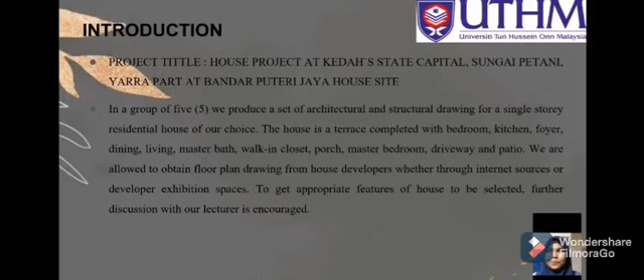We are allowed to obtain floor plan drawings from house developers, whether through internet sources or developer exhibition spaces, to get appropriate features of the house to be selected. Further discussion with our lecturer is encouraged.

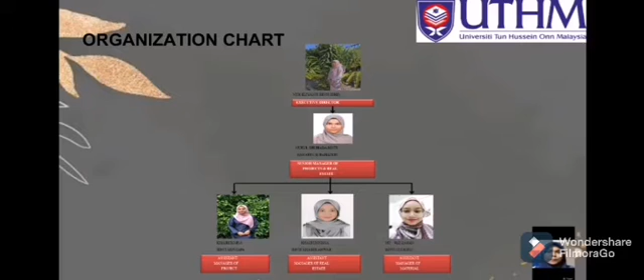For the organization chart: our executive director is Nur Izianti binti Idris. Our senior manager of projects and real estate is Nurul Shahada binti Bahrain alias Bahadun. Our assistant manager of project is Karunisa binti Mustafa. Our assistant manager of real estate is Karunisa binti Karil Anwar, and our assistant manager of material is Nur Zaya binti Zulkifli.

Project description: the location of the project is at Yarra Park, Bandar Puteri Jaya, Sungai Petani, Kedah. The feature of the house will be a one-story terrace house, 3 bedrooms and 2 bathrooms, and a porch. The size of the house will be 6.5 hectares.

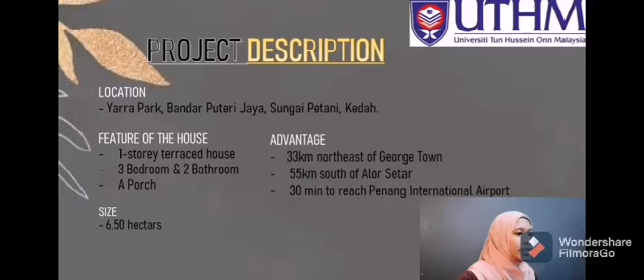The advantages of this project are: first, it is located 33 km northeast of George Town, and located 55 km south of Alor Setar. The third advantage is it only takes 30 minutes to reach Penang International Airport.

This is the feature of the house. One of the features is urban design criteria. The proposed building will create a distinctive urban form in the local area. The concept plan and build form were developed to propose materials which are in harmony with the existing buildings and surrounding developments.

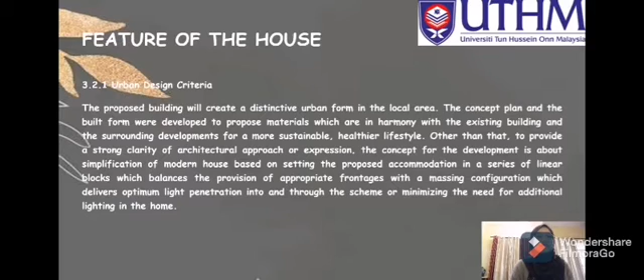To provide a strong clarity of architectural approach or expression, the concept for the development is about simplification of a modern house based on setting the proposed accommodation in a series of linear blocks, which balances the provision of appropriate frontage with a massing configuration that delivers optimal light penetration through the home, minimizing the need for additional lighting.

The next feature is structure. One structural feature of this house is the overhanging roof. The house is designed with large overhanging roofs that act not only as protection from pouring rain, but also as a sun shading device that reduces direct exposure to sunlight into the house, and reduces heat gain and glare.

Next is concrete and steel structure. The main material of the structure of the house is steel. It is used as a structure that supports the main structure, which is the reinforced concrete used as the foundation.

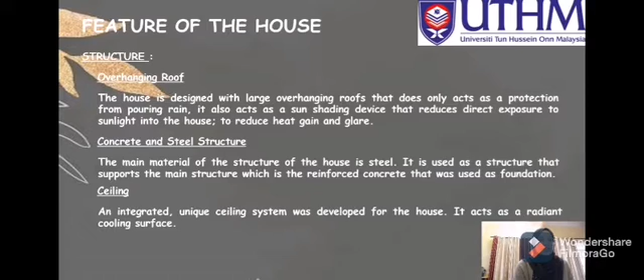The last structural feature is the ceiling. An integrated, unique ceiling system was developed for the house, which acts as a radiant cooling surface.

Next is house description and design. First is orientation. The house was oriented facing the northeast direction, with southwest as the back. The direct sunlight diffusing into the house from the east and west was minimized by the strategic orientation of the house.

The second description is interior design. First, multiple suites: this house has one master suite and 2 bedrooms, providing private space for each of the large family members while enabling them to share resources under the same roof. It also gives benefit to a large group of friends who desire to share a house in order to afford real estate in a desirable area.

Next is eco-friendly.

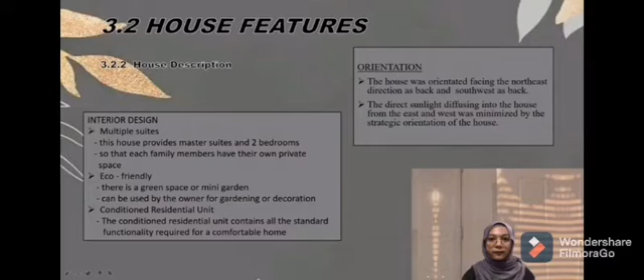Inside the house area, there is a green space or mini garden that can be used by the owner for gardening or decoration. At the same time, it can help with air pollution as a few indoor plants can help improve air quality. Why should people buy our house?

First, it's an eco-friendly house. Our construction house is considered an eco-friendly house because it is an environmentally low-impact home design, built using materials and technology that reduce its carbon footprint and lower its energy needs. An eco house could include some or all of the following: higher than normal levels of thermal insulation, and better than normal air tightness.

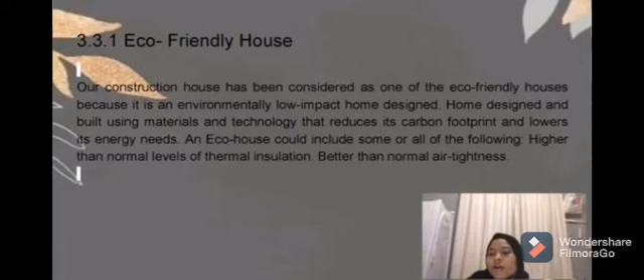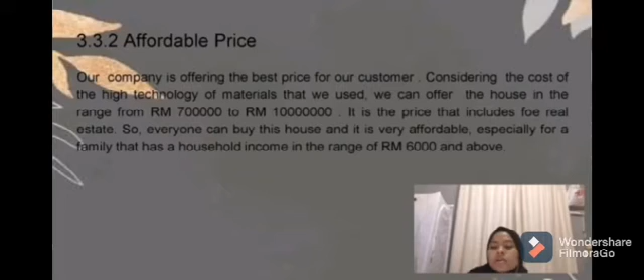Second, affordable price. Our company is offering the best price for our customers. Considering the cost of the high technology materials we use, we can offer the house in the range of 700,000 to 10,000,000 Malaysian ringgit. This price includes full real estate. So everyone can buy this house, and it is very affordable, especially for a family with a household income of 6,000 ringgit and above.

Third, strategic location. The location of the house is very strategic since it is in the middle of the city. It will be easier for the owner to go to work and shopping. There are many public facilities in this area, due to the location near the hospital, shopping mall, and there is also a playground to play sport on the weekend. Besides, the neighborhood is safe because the residential area is guarded 24 hours a day. Moreover, the house is right on the waterway with a beautiful panoramic view.

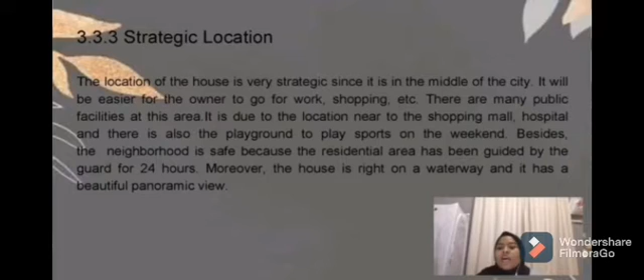Another reason to buy our house is access to public transit or freeways, since the location is in major cities, the house is closer to public transport. For example, it is close to the train station and bus station, which makes it much easier for people to get to the residence anytime and anywhere.

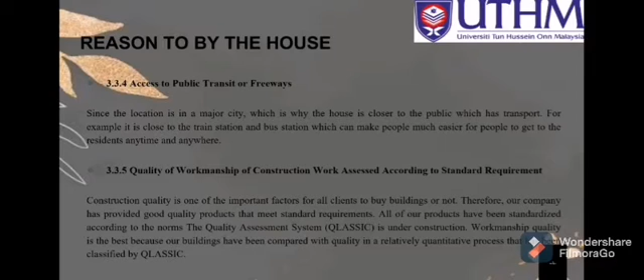Next, the reason to buy the house is the quality of workmanship of construction, which is according to standard requirements. Construction quality is one of the important factors for all clients when deciding to buy a building. Therefore, our company has provided good quality products that meet standard requirements. All of our products have been standardized according to the norms, with a quality assessment system in place during construction. Workmanship quality is the best because our buildings have been compared in a relatively quantitative process classified by QLASSIC.

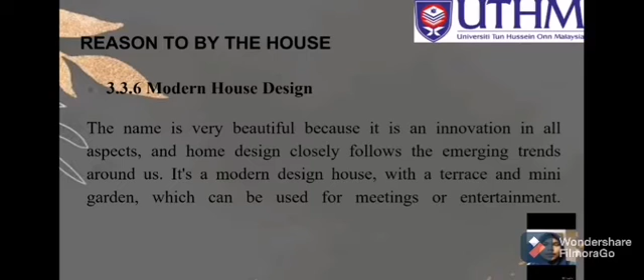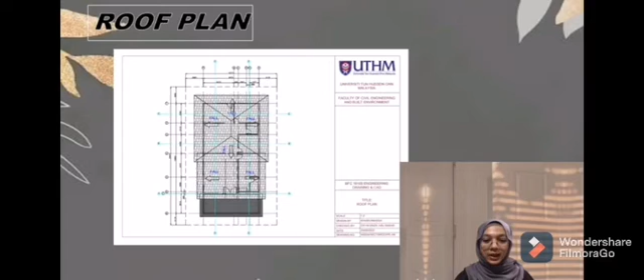From the cross section BB, we can see through the house, including the dining room, the kitchen, bedroom 2, and bedroom 3.

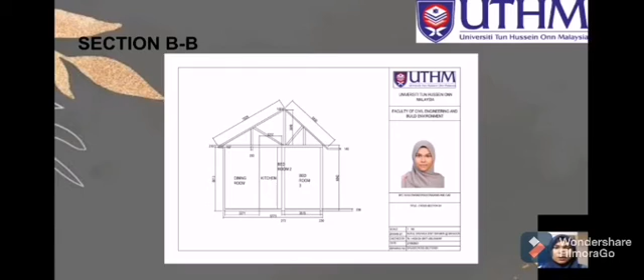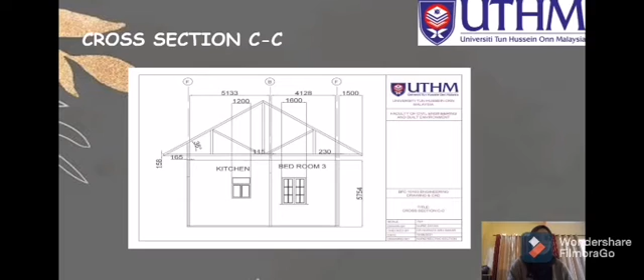This is the cross section CC. There are 2 windows there, and we use metal material for the window. The height of the wall is 5,754. The truss type of the roof is Howe truss, and the thickness of the roof is 158. The thickness of the truss is 115. So this is the cross section area.

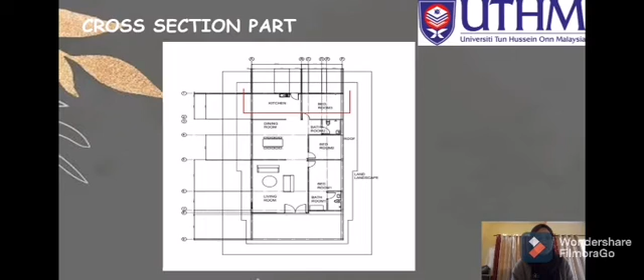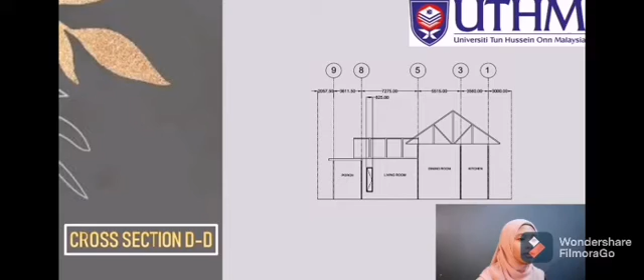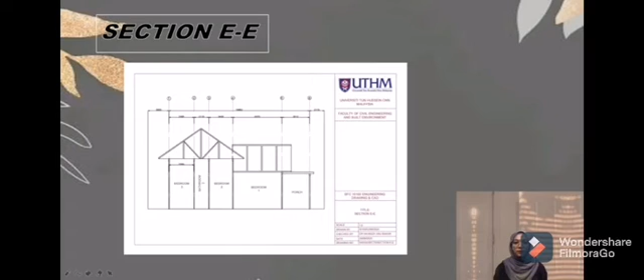This project required all of the group members to draw a cross section, so I am choosing section EE for my task. From the drawing, we can see bedroom 3, bathroom 2, bedroom 2, bedroom 1 or master bedroom, and the porch. This is the footing plan for this house.

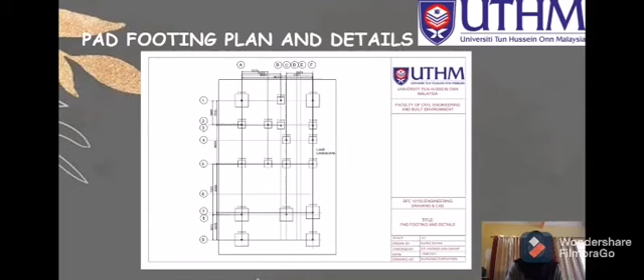There are 2 types of footing, that is F1 and F2. In this plan, we have 18 footings under the ground.

This is the footing details. From this drawing, we have two types of footing, that is F1 and F2. So the footing dimension for F1 is 1000 wide times 1000 length times 300 height.

And the F2 we have 1800 wide times 1800 length times 300 height in millimeters. And for the reinforcement, we have two types of bar and one tie. So for the rebar of these two types, we use high yield steel.

For the F1, we use bar with 20mm diameter, and the distance between each bar is 125. Then for F2, we use 25mm diameter high yield steel bar, and the distance between each bar is 125.

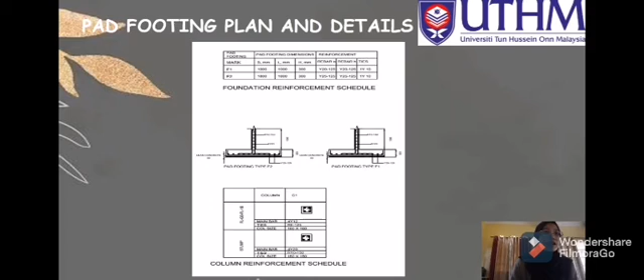Same goes for rebar B for these two footings. For this type, we also use high yield steel with 10mm diameter for both.

The structure drawing for the ground beam: we have the exterior ground beam at 250 times 450, and the interior ground beam has a dimension of 300 times 450, and the column is 250 times 250.

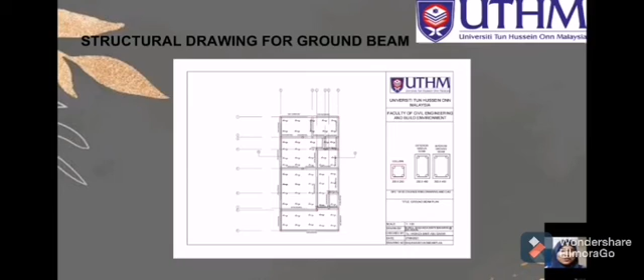For the ground beam detail, we have the column at 250 times 250 with a pad cover, and the exterior ground beam is 250 times 450, and the interior ground beam is 300 times 450.

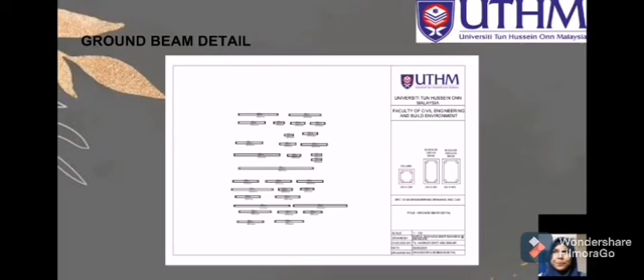Roof beam plan. The size of the plan for the length is 9,571.16 millimeters, and for the width 19,961.50 millimeters. The size of the plan gives us 16 grid lines.

From the above, we get to see grid line A, grid line B, grid line C, grid line D, grid line E, grid line F, grid line G. From the left side of the plan, we have grid line 1, grid line 2, grid line 3, grid line 4, grid line 5, grid line 6, grid line 7, grid line 8, and grid line 9.

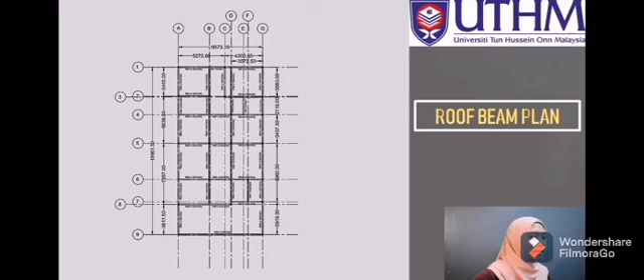Next, roof beam detail. Here, I have separated it into two parts. From the right side, we have the roof beam from the length of the plan. I have arranged the roof beam from roof beam 1 to roof beam 9, from above until below.